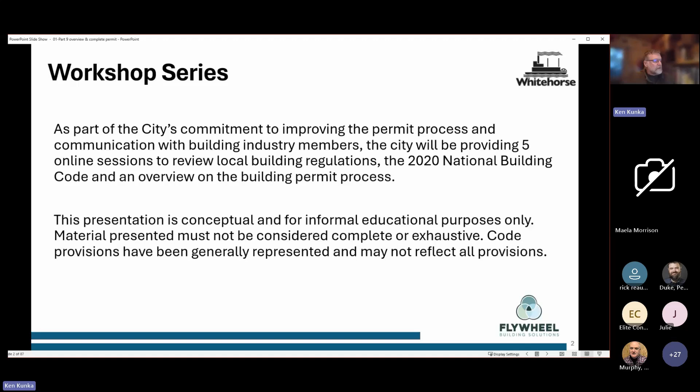This presentation is conceptual and for informal educational purposes only. The presentation is not considered exhaustive. I'm just going to touch on codes and bylaws today, but I really suggest you do a deep dive as we work through the 5 sessions over the next few months. The code provisions generally represented may not reflect all provisions.

As Peter said, we're committed to 5 workshops. I really appreciate the opportunity to sit down with you as a builder group, and the time I had up in Whitehorse was fantastic. I've never been up there, and it was really great to be able to see the town, and really looking forward to making it back in the summer.

So today we're going to look at codes, bylaws, and regulations, an expansion of what we did in the workshop, and then we'll move into the more technical items. Eventually, all these webinar series will roll into an online and hard copy guide for permits for residential permit types, which I hope will help in the permit and inspection process.

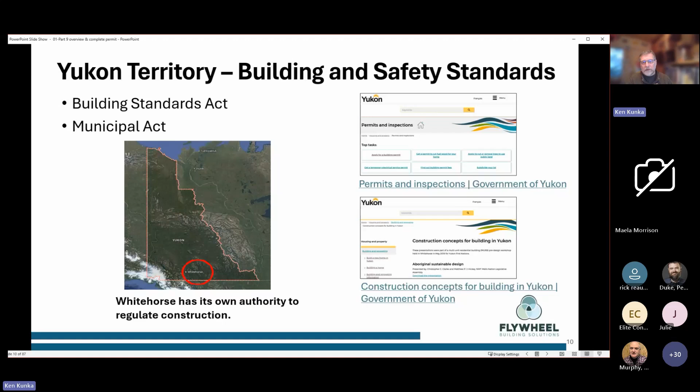So, Yukon Territory, the building safety standards - this is interesting, I had thought that there was a...

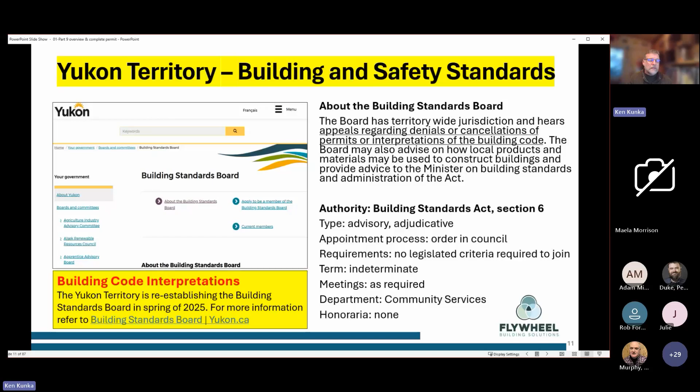Here's appeals regarding denials and cancellations of permits or interpretations of the building code. This is really important because if you get in a bit of a loggerhead with your local government here in Whitehorse, there is an avenue. Unfortunately things kind of slipped off the rails, and I believe the board is reestablishing itself - it's really good, and I believe there's also some interpretations and appeal requests in right now, so keep your eye on that. If you would like to be more involved in construction and regulations, I would recommend that you apply for this, and there's some links towards that. It's a really great group, and again, that unbiased third party between you as the developer or designer on that side of the industry and the building officials in the town of Whitehorse. If there is a little bit of a disagreement, there's an avenue to review.

I'm going to go over some of the regulations on a high level, and these are prescribed to outline what a jurisdiction can and can't do. So there's the Municipal Act, and I've listed a few sections here from the workshop that we did. There's general jurisdiction to pass bylaws, so it's really important to understand that the city doesn't just make things up. There are policies and things change from time to time as projects evolve, but everything's based on establishing rules within a bylaw, and that's where the jurisdiction administers, particularly here, in exercising the bylaw-making power, section 266, without restricting 265, which tells you there's the Building Standards Act and what that plays a part in.

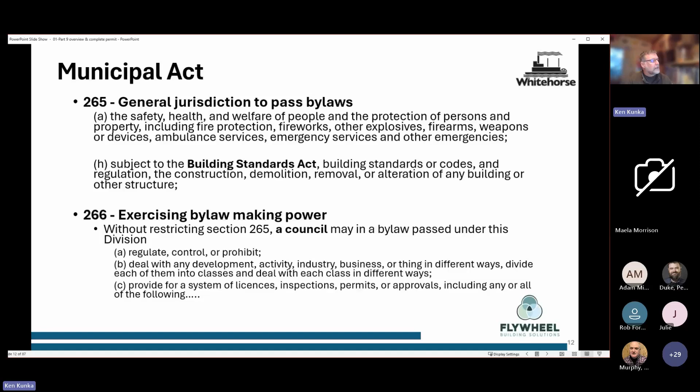Without restricting 265, a council may in bylaw pass under this division, regulate and control and prohibit, deal with any development activity, provide for any system, license, inspections, permits, or approvals. So again, that's where the city gets its authority to act related to construction. The Building Standards Act also ensures that the national code is the building code that will be used.

It's funny, over the years I've had people phone me, especially here in the Okanagan where we have many small towns and Kelowna, the big city, and they ask what code are you using? It's like, we're all using the same code. We're using the BC code here locally, but it's the interpretation that gets a little cloudy.

That's why we're having these sessions, to ensure you understand the premise of where the city is coming from developing bylaws, rules and processes, and where you can provide input and commentary, perhaps making it better, because the city is making a lot of changes as a commitment to improve permit processing.

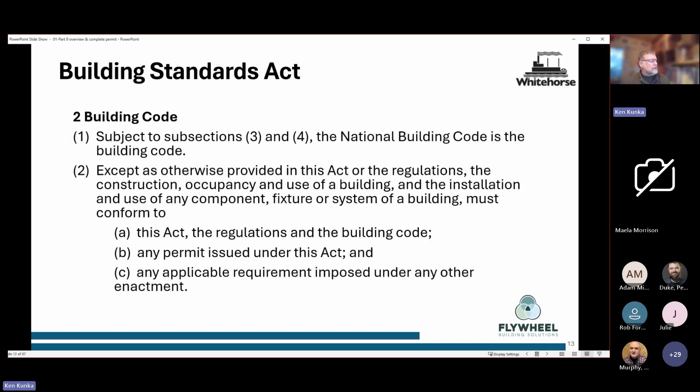The national code is what we're working off, the 2020, except where otherwise provided in the act or regulations, for the construction, occupancy, and use of a building, and installation of component fixtures and systems—your plumbing, heating appliances, those types of things. This act and regulations of the building code apply to any permit issued under this act. Just a bit of background on that.

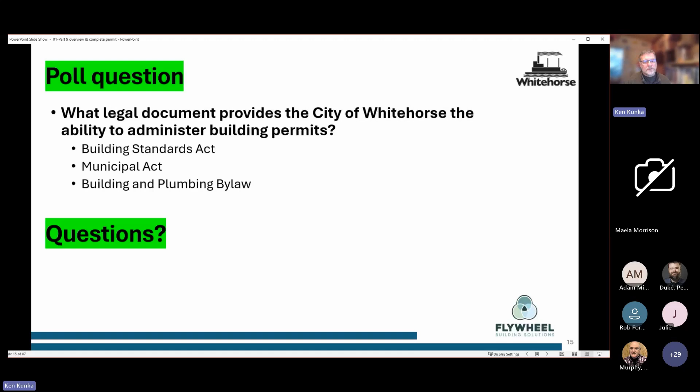Local bylaws—so we've gone from federal jurisdiction, to Yukon, and now into a local area here. It's really the city's building bylaw that administers how construction permits are dealt with. The bylaw applies to the design, construction, and occupancy of new buildings, and the alteration, construction, demolition, removal, location, and occupancy of existing buildings. That also includes the change of use, which we'll touch on a few times this session and the upcoming session, especially near the end.

The building code applies to all the work regulated by bylaw within the city of Whitehorse, as prescribed in the Building Standards Act. And as the Building Standards Act notes, it's the national building code that we're working off.

This is just an example—the bylaw is a little bit older, adopted in 1999. It's had a few amendments, particularly around dealing with step code, or rather performance modeling. That's an avenue, but I just want to show it. It's not a long document, so it's not a fantastic read, but it's good to know this, because just like you buy a tool, saw, or software system you'd use in day-to-day operations, it's good to understand that this is really what we're building off of—the bylaw—and it will likely be updated as processes change. They kind of have to happen hand in hand as we move forward.

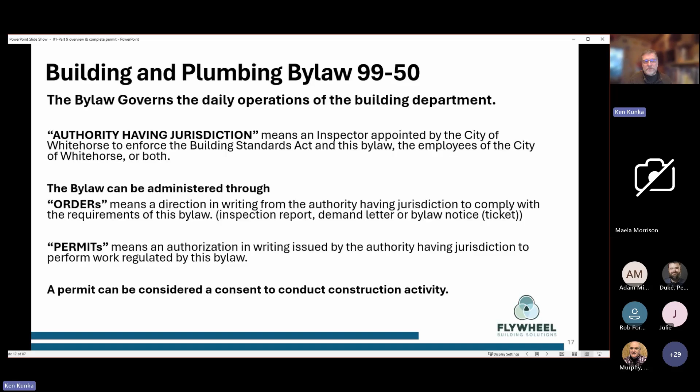I like that connotation of it. So again, the permit equals a consent to build, and the bylaw outlines when you need a permit, when you don't need a permit. But really, a permit ensures general compliance with code and the city regulations, so not just the building bylaw and the building codes.

It also, if you've been through the process through the years, involves other bylaws, which we'll touch on as well. It ensures safety for family, workers, patrons, and emergency responders - so anybody going and using those buildings. It also now involves energy conservation and accessibility for all members of the community.

It ensures long-term sustainability of the community. And what I mean by that is making sure buildings are built well. The bylaw itself doesn't guarantee workmanship, being plumb and square, but ensures it meets minimum standards.

It also ensures that as part of the process, permits are finished out, and buildings are not left incomplete, which will degrade the building over time. It's not finished off properly, and it also doesn't look very nice for the community as a whole to have unfinished buildings and projects, particularly when things are selling and purchasing, and then people find out there are open permits. Not great for the community as a whole.

It protects the future owners of the building, and when I mean that, we usually think about customer service, providing customer service. In our line of work as a building regulator, that's what we're hired to do. We're here to help you through the process as a building industry partner, but as you know, there's many gears and many hoops to go through to get to the end product, and you're our customer.

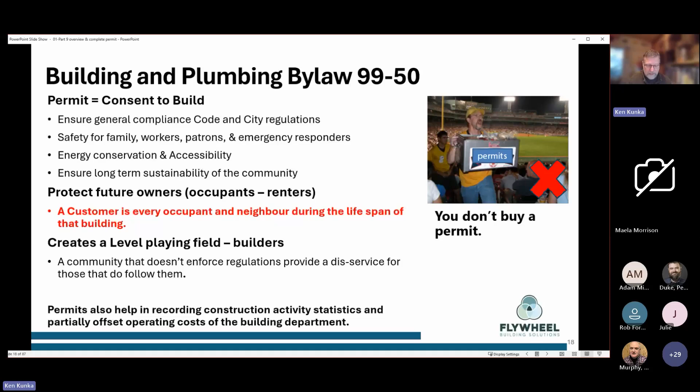Permits also help in recording construction activities, so we know what's going on in the community, relating to our budgets, and it partially offsets the operating costs. It doesn't cover all of it, not nearly. I don't think there's any discussions for fee increases - there always is, as the economy changes and inflation goes up - but at least permits help offset and not feed into taxpayer support for building and plumbing.

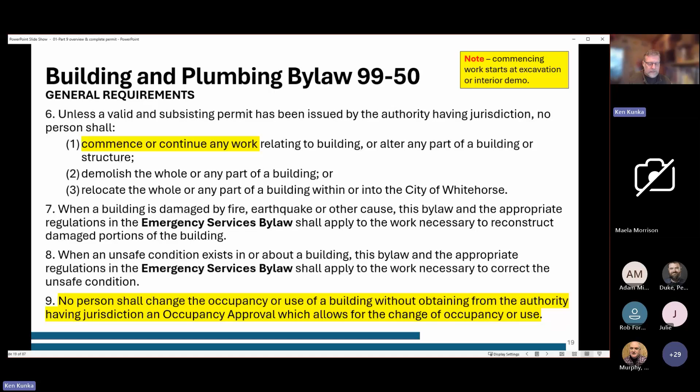It may change from an office space to a retail space, or retail space to a small coffee shop. You're not maybe even doing any structural changes, just painting and adding little bells and whistles to the unit, adding a wall divider. But again, you're changing the use. That may implicate the fire separations required between units in a commercial building, or impact exiting routes or number of exits depending on the use. It's really important when doing commercial alterations, even changing a garage to a finished space - that's also a change of use. You want to get a permit for that too, because there are a lot of safety and health standards to maintain.

Just going to go through a few bylaw sections here - the highlighted exemptions. Anything more infrastructure-related is not regulated by the bylaw, but I wanted to highlight this one because it can be controversial, especially now in this day and age of small office buildings or units being placed on property, short-term rentals, those types of things. Accessory buildings not greater than 10 square meters in building area, provided they are not used for occupancy - meaning not intended to be lived in. They're really a garden shed. The one thing that may be coming up as a change is the 12 square meters.

And I see Peter's also put some notes in here in the chat, so you may want to check on upcoming changes to the bylaws.

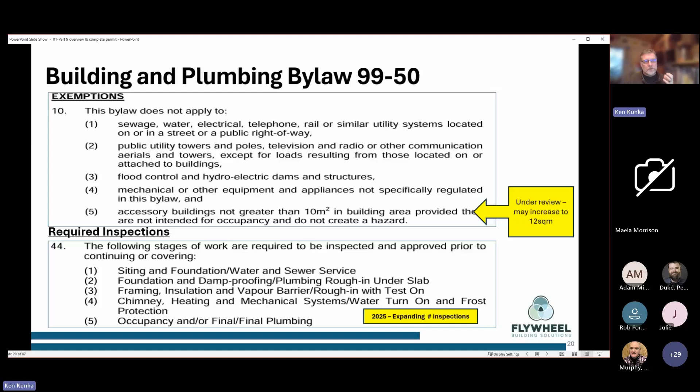The following stages of work in section 44 list the minimum inspections, particularly with residential construction. These have been expanding and will continue to change as the building process becomes more complicated. Richard has explained to me that there have been some issues, so they're segregating some of the inspections a bit more in detail, which may delay things but may also help avoid problems in the process. You have to look at it two ways when thinking about inspections: it ensures minimum standards are met through the phases of the auditing process, but it's also helping you as a builder collect yourself and your trades, making sure through the stages - and there'll probably be a few more stages - we'll go over that more at the end of the presentation.

Obligations of the owner: the owner is ultimately responsible. If you're a contractor or developer acting on behalf of the owner, or you may be a spec builder, you are the owner. So you take a lot of responsibility, both in the national code, meeting those standards and requirements, particularly in the building and plumbing bylaw as well.

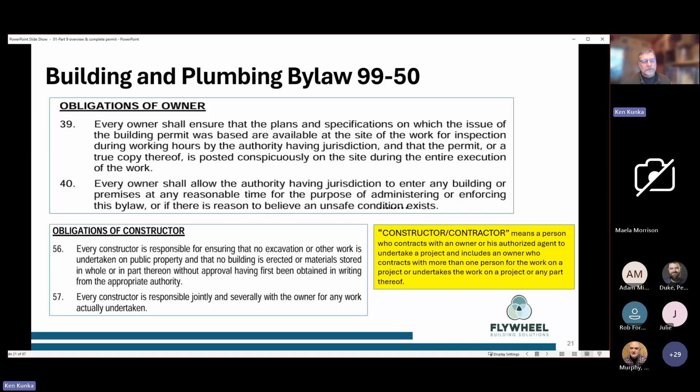There's also a section on obligations of a constructor, and this has been in standards for a very long time, and it's been brought into a lot of new model bylaws just to make sure that the person or persons working on site on behalf of and being hired by the owner or the owner's agent take on a lot of responsibility. If things go wrong, people can't just decide it's not their responsibility to fix these things. Everybody has to play a part in this, and the bylaw outlines that.

So it gives some responsibility on the building official side to keep the process going. In appeals, I had mentioned that if you're having some difficulty with your building official, internally they're always debating and talking about building code items, plumbing code items, and bylaw interpretations.

And there's a lot of vetting internally when you have multiple persons on staff. It's a little different in a small town when you have one building official who becomes the sheriff of the town - you don't want to take their bad side. But here, even in the few days I was here in December, I heard a lot of discussion and changes and ideas about code interpretation.

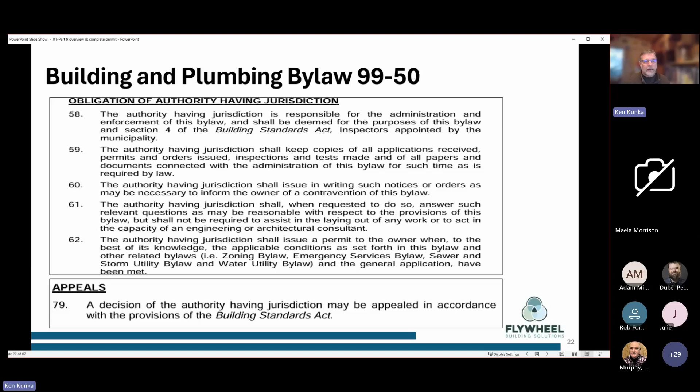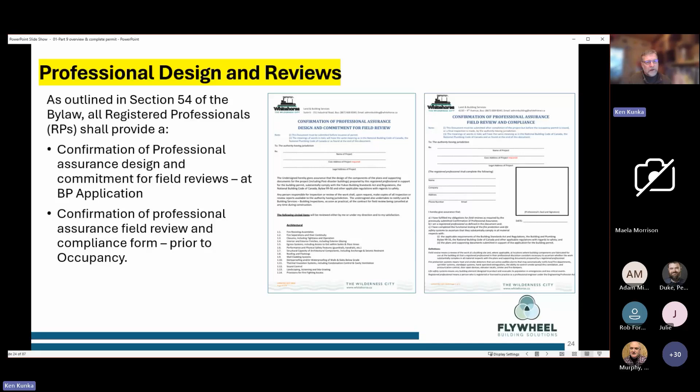And then at the end, when field reviews and construction are done, then you're signing off. So just want to be mindful - this will come into play a lot more for some projects as we move ahead.

There's also the project contact list, and it's really important when you have multiple professionals - you may have a geotech, you may have a structural engineer, you may be working on a larger project. This session and most sessions moving forward will focus on small residential Part 9 projects, but if you're dealing with a larger Part 9 or a Part 3 building, a more complex building, the city will need you to list all the professionals, because I believe what doesn't happen in the Yukon and specifically in Whitehorse is having a coordinating registered professional. If there's somebody on the building side who knows I've missed that, let me know.

You could have multiple engineers and an architect, and the coordinating registered professional makes sure they're all working together. That was brought in, in BC, in the mid-80s, when they were having large projects and the engineers weren't coordinating with each other.

We call it the Save on Foods case, where I think it was the day or the day after this big Burnaby store opened, the car park on the roof actually collapsed into the grocery store. That's because somebody wasn't overseeing what was happening on the engineering design and people weren't talking to each other. Unfortunately, it's happened in other cases.

That's why it's really important to list all the professionals and all the contractors and sub-trades working on the project. It also relates to business licensing, to make sure everybody has a business license.

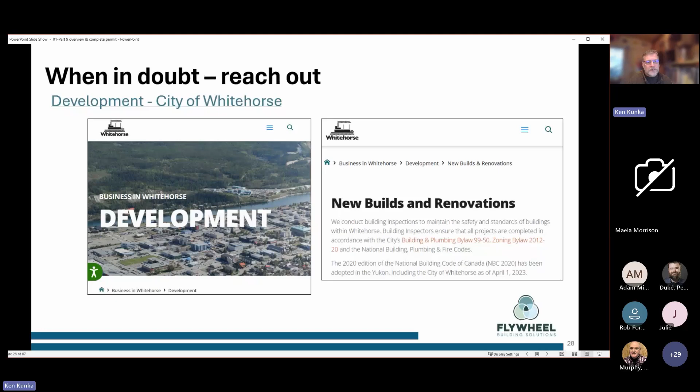If you have a question, or you're thinking of doing a renovation or new construction, or even using a different kind of product or way of building that you've seen somewhere else, it's really important to reach out. It's not a big town, so there's no excuse not to stay in communication.

This is a poll question again — you can think about this or put it in the chat. What legal document must be provided by a registered professional at the time of the building application stage?

I had mentioned there are a few different documents. Basically, it's a confirmation of professional assurance of design and commitment for a field review and compliance. So by the nuancing of the word here, it's the commitment for the field review — the design meets code and the bylaws, and then there's the commitment for field review. That's the form you want to bring in.

I have about ten slides here, and after that I think we'll take a break. But if you have any questions about what I spoke about regarding the regulations, let me know.

So now we've gone through the multi-level layers of federal, provincial or territorial, and local bylaw jurisdiction and building regulations. Now we're just going to go through a quick, and in some aspects deep, review of the national code and how it was developed.

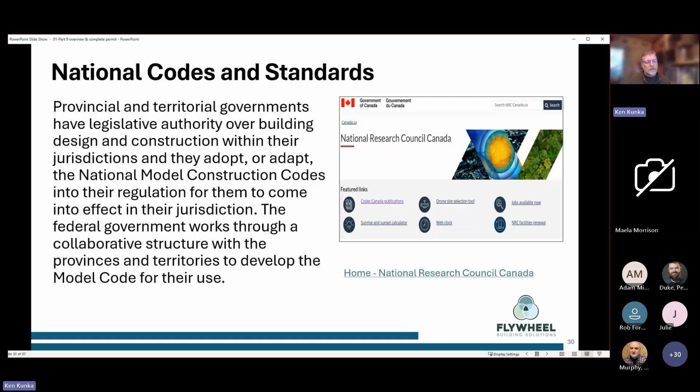Regarding higher density, the codes are continually evolving. The national code was set up through the National Research Council for all provinces, territories, and local jurisdictions to use and model after. Codes are the minimum standards. They're created for the worst case scenario, which in our industry as a building official means people die, people get sick, and then there's the financial implications.

If you're aware of what was happening in BC and other jurisdictions in the 90s, it was the leaky condo crisis, where billions of dollars were spent fixing buildings that should never have had to be fixed. That was a compounding of different issues where the codes had changed, the trades, and even the building officials weren't totally up to speed on building science.

Poor detailing previously was actually enhanced by sealing up the building. Sealing up buildings is great because it becomes more energy efficient, but if you're still using the same old ways of detailing the building envelope, you're not allowing those walls to dry out. So there's a compounding factor of things that led to many changes, particularly here in BC, but also nationally. We've had whole subdivisions in Alberta burn down because they built them too close together.

Unfortunately, through history, this has happened too many times, and we forget the past. But really, we have to think about worst case scenarios. Sometimes when your building official and yourself on site are debating, or a designer is debating something, it's like, what is really the big deal? Well, the big deal is something bad can happen, and we're trying to avoid that as best we can.

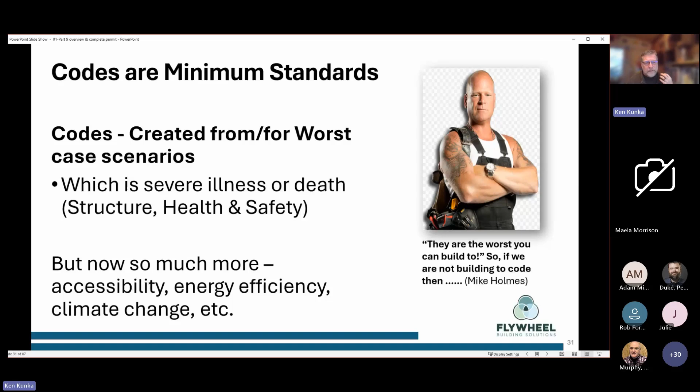You're seeing climate change. When I was there, it was minus 15 one day, and then it was plus 5 three days later. There's some really strange things happening now in the climate, and I also believe there's some things happening that we really need to take and address in future codes.

The national standards include 4 basic codes nationally: the building, the plumbing, fire, and energy codes. For our future reference moving forward, I'll be mostly concentrating on the building code and in part 9 of the building code. The NBC is made up of 2 volumes.

There's volume 1, and then there's volume 2. Volume 2 is really dedicated to part 9 sections. It's really based on an objective-based code format, relying more on objective and functional statements. There's a rhyme and reason to why these items are in the code, and actually the code explains it when you're trying to achieve it.

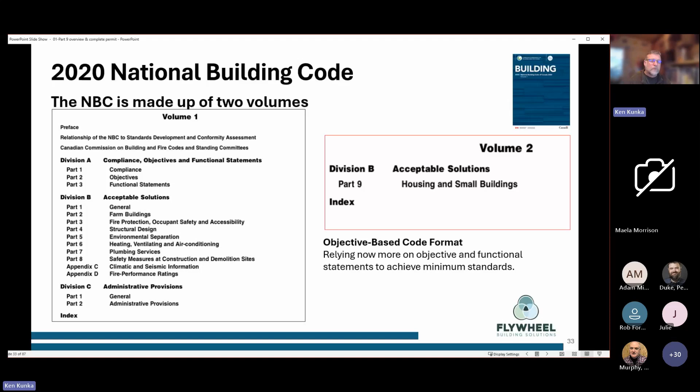In volume 1, it's broken down into 3 main divisions. There's Division A, compliance objectives and functional statements. Division B, acceptable solutions, which I've highlighted, and I will go over that in a few slides from now.

And Division C is administrative. A lot of people just think about what the code is, whether it's building or plumbing. They only look at one part of the code, if they do happen to look at code or the bylaws. But there are two other parts that are really important to understand, because they all fit into each other.

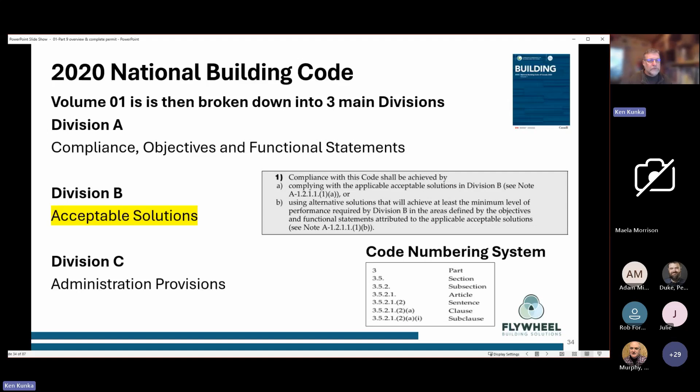Division A defines the scope of the NBC and presents the objectives of the code, and addresses the functions that the building must perform to help satisfy those objectives. Division A cannot be used alone. It's supplemental to the rest of the code. It includes standards and references.

So when we talk about permanent wood foundations, we're looking at S406-16. You have to be very aware of the standard and the date reference of those standards. It outlines defined terms, objectives, and functional statements. And we talk about functional objective statements.

And then you can find within the code, and again, the only problem with the digital code is it's not very functional. I know they're working on that to make it a little easier to move with hyperlinks, but for time you can work yourself through it.

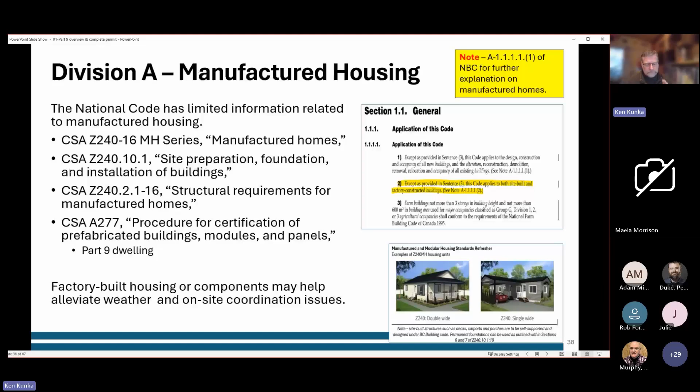I believe the other items outside the building, I'm just going to go back to that because it's a really important note.

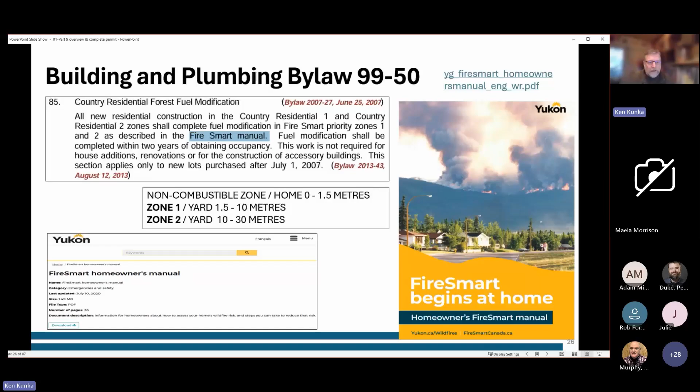But I think it will, and even codes will start demanding this when you're in wildfire interfaces, and this will be driven by insurance companies no longer insuring homes or buildings if you don't meet certain requirements. That's what happened in Lytton. And there are actually some fire resistant rated walls now developed by RDH, a building science firm. It adds cost, but what is the cost of losing your home when you don't have to, from fires spreading between each other?

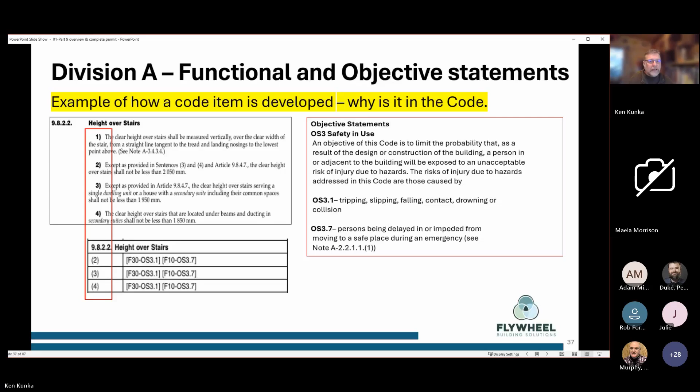Thanks, and I'll look at that, looking at the chat again. We're going to talk more about that as we move forward.

Volumetric modular projects, so again, not just small single wide, double wide, A277, which could be a house built on a foundation, but we're also looking at volumetric. You could have a very large building shipped into town in components and set up.

So you can imagine once you get the foundation and servicing in, it'd be quite quick. This standard, if you're interested in looking at something like that, it's not in the code, it's not a standard requirement. It's more of a guide, developed with all industry partners, talking about how building officials get involved, how the local community jurisdiction works through the process with the building industry partners to make sure it's a smooth process.

Because the biggest issue with any type of manufactured home, especially volumetric, is that all the permits have to be in place and fully understood before they actually begin production. So the sooner approvals or pre-approvals can be developed with no changes required, the building process can start right away.

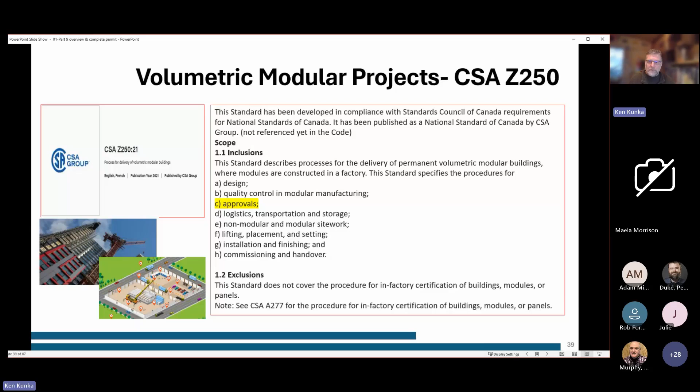Division B, and I mentioned acceptable solutions. The term acceptable solution refers to the technical requirements contained within the code. It reflects the principle that the building code establishes an acceptable level of risk or performance, and underlines the fact that the code cannot describe all possible valid design and construction options. Acceptable solutions represent the minimum level of performance that will satisfy the national code objectives.

The authority here locally in Whitehorse, the building official, adopts the NBC into the law and regulations. It's an acceptable solution to meeting a requirement within the code, to build to a minimum code requirement. The acceptable solutions are linked to at least one objective and functional statement, which we went over previously.

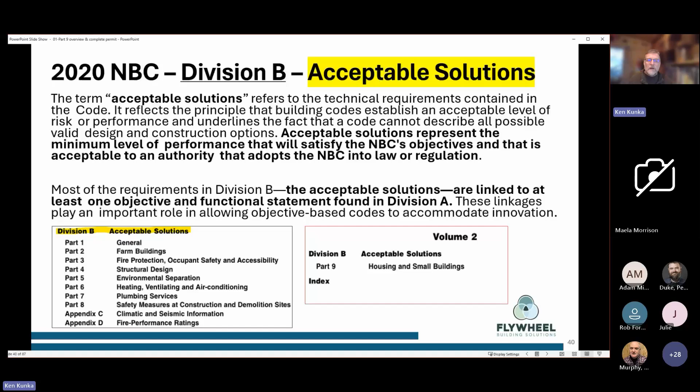Why is it in the code? Well, it outlines the functional objective statements in it. Climatic data, let me just go back, sorry. Yeah, Division B, climatic data is found in Appendix C.

Whitehorse is in climatic zone 7B, as I'm sure you're well aware. We had been talking about some frost protection depths, and it's quite drastic in Whitehorse compared to Vancouver, where I used to work, where it's 18 inches. So you guys got a lot of work, and I understand some of the complications and soil conditions in new subdivisions are really creating some grief.

Just a note below that highlighted yellow box on the top right: in the code, when you're dealing with Z240, those manufactured home units, there are some relaxations to frost protection in there. So again, maybe keep that in mind. I think that's something to review with your building authorities to make sure that's still a good idea.

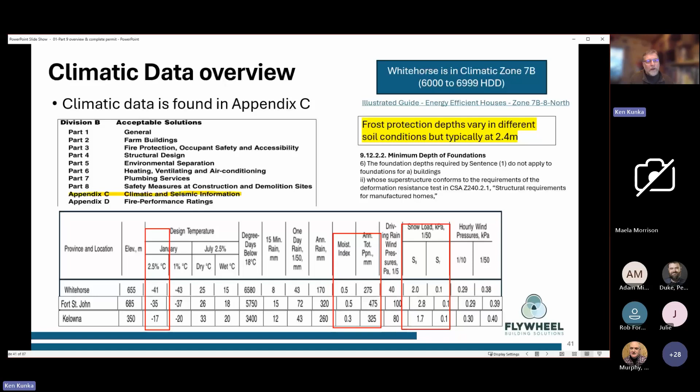When we look at climatic data, I wanted to reference - you'll see on the bottom screen there's Whitehorse, Fort St. John, and Kelowna. Obviously your design temperatures are quite drastic compared to say where I am in Kelowna. But I was really surprised that the annual precipitation, snow and rain, is actually lower in your area. So I always thought Whitehorse was a high snow load area, but my understanding is that through code cycles that is changing. You are experiencing a little bit warmer temperatures, getting a little bit more snow, and probably getting a little more wet snow, which is actually increasing some of your load calculations.

Your seismic data review - I wanted to bring this up because this is going to be a significant change coming up for us here in BC starting this March. All homes, Part 9 and Part 3, are going to fall under new stringent lateral load and seismic design requirements, and I believe that's also going to be happening in the national codes as they roll out too. So it's very mindful, and I'd like to touch on this in session 3 regarding framing. We're talking about design of wall panels to resist lateral load - I have another slide on this - but we're not talking about shear walls or anything like that. You do have to put this into your memory bank of these things happening and changing.

Division B, Part 9. I'm not sure why I had the climatic data in there, but I'll change that for future presentations. I just want to touch on these items today, and then we'll jump into some very specific permit requirements - applications and definitions, materials, and structural requirements.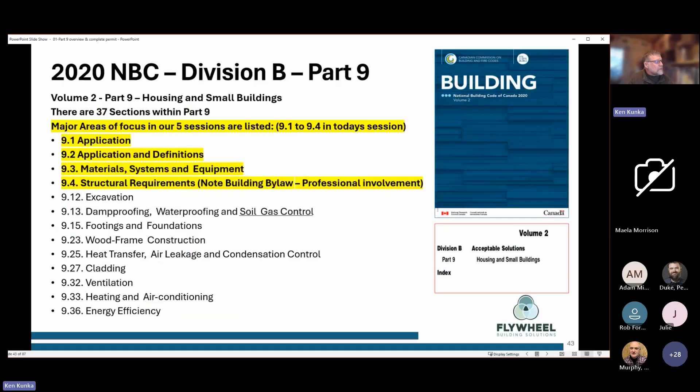9.1 to 9.3 of the NBC covers floor area limits and secondary suites, which is different than the BC building code. There are outlines for concrete, and just be aware that when you see designs, unless they're through a professional engineer, there's no requirement for rebar in concrete, other than when dealing with insulated concrete formwork, ICF, which is prescriptive in the code. So there's a bit of a misunderstanding out there - even designers don't really have to put rebar in designs. Technically they shouldn't, because they're not a professional engineer. So it's really up to the standards of the builder who wants to put that rebar in, because it can probably prevent some issues happening later on. But unless it's a registered professional, nobody should be designing that other than the prescriptive measures for ICF.

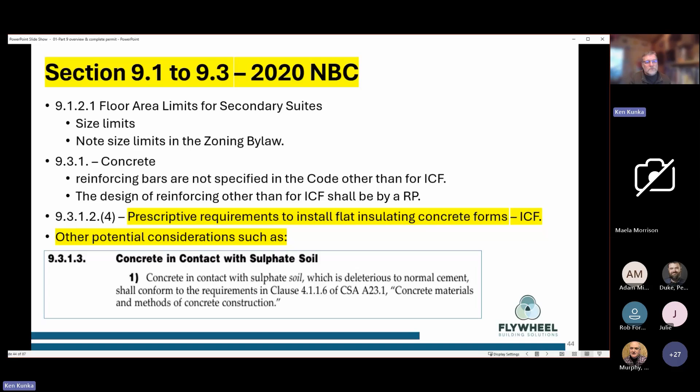There's also other items when you're dealing with subdivisions. You want to understand the soil and soil materials, not only for what we deem as ice lensing - soils adverse to freezing - but there are also certain soils in the community that are adverse to even concrete. I know here in the Okanagan there are some major issues with soil conditions actually eating into concrete unless the right admixtures are in there.

There's cold weather requirements, which is kind of a funny thing, because for many months of the year you're in definite cold weather conditions. But I think we have to understand as an industry that you're not going to heat and hoard your whole development site during the winter. Are there other precautions that can be taken at different stages of construction? When I was there, I was really surprised to see how many heating units are going into buildings, and seeing the amount of frost leaking out of the buildings, developing on the building envelope on the outside and the interiors. So you have to be really mindful of the amount of water that you're putting into the building, and I'll touch on that in a slide coming up.

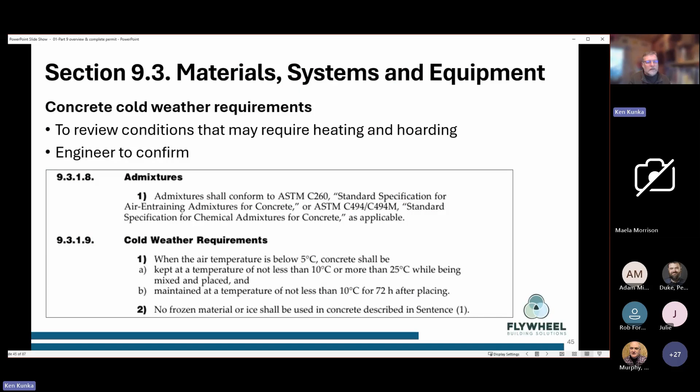So here's structural requirements 9.4. This outlines when you're doing a Part 9 home, a house, a simple building, an accessory building, how you can work in Part 9 and not need an engineer. Or maybe you need an engineer for your foundations because of the soil conditions or how the foundations are being constructed, but the other parts reflect back to Part 9.

When you look at the left side at 9.4.2, specified loads, A, B and C: the roof and wall planes to be clad, sheathed, or braced at least one side - usually your OSB. Small repetitive structural members spaced not more than 24 inches on center, 600 millimeters on center. The clear span of any structural member does not exceed 12.2 meters, which I believe is 40 feet. So if you have a truss greater than 40 feet, that's designed to Part 4 now, not Part 9.

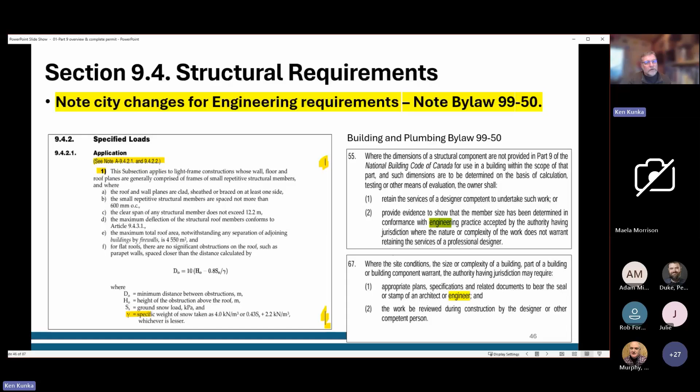Even with engineered design, there's been some debate, and I'll touch on that in a slide coming up, that an engineered truss is an engineered product and should have an engineer designing and sealing it. I know there's some discussion there. Going back into the bylaw, these engineered components, as an engineered product as a whole, if not meeting Part 9 prescriptive requirements outlined in 9.4.2, you're looking at bringing in an engineer.

Specific snow designs - being mindful that as climate change happens, whether you agree or disagree how it's happening, something weird's going on. You're really seeing dry summers and now wetter, warmer winters, which really impacts your snow loading. Just a calculation of how you're looking at this, and being mindful of where you're using balconies as part of a roof structure - there are some prescriptive measures there.

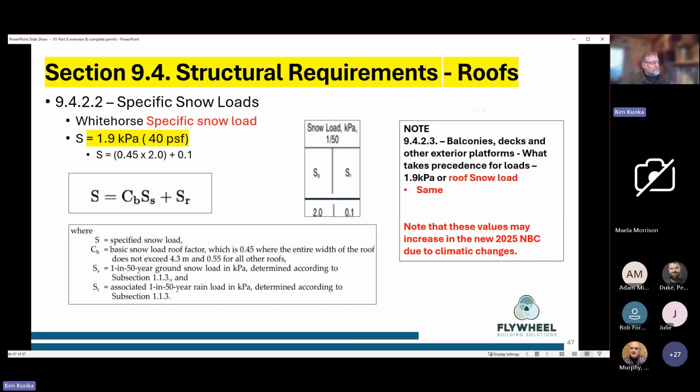If you weren't aware, adding solar panels - I saw a lot of solar panels, which I think is a fantastic idea, since for the majority of the year you're getting a lot of sunshine. But the national code, and now the BC code, have adopted a similar format that those need to be evaluated by an engineer. So when the truss is being reviewed, if you're putting a solar panel system in, those have to be designed for it.

You also have to be aware that if you're not putting in solar panels but instead a metal roof with snow dams or snow locks in place holding snow, you're changing the dynamics of how that snow sits on the building and collects drifting snow. We have to take those precautions into account - we have to be mindful.

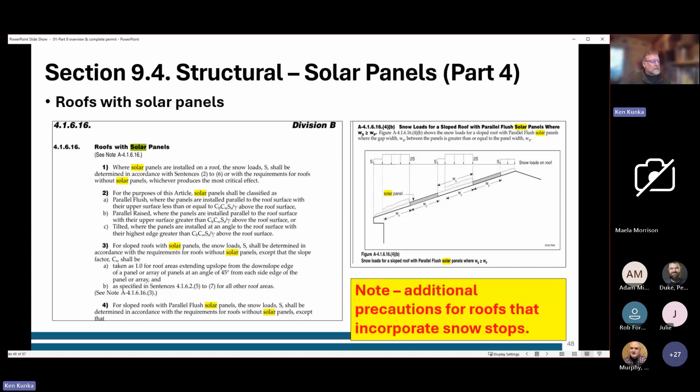When we look at soil bearing footing design, you're looking at 9.4.4, the foundation conditions, and we're going to do another deeper explanation in session 2 on this. I just wanted to show you what's going on here, and we'll go through some of the subdivisions and soil reports, and outline what we're typically dealing with.

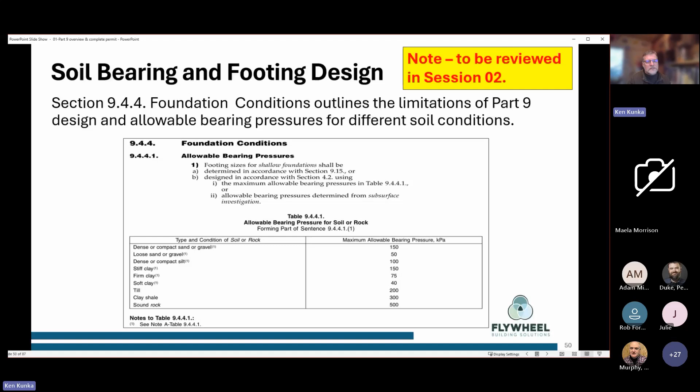When you're dealing with your older subdivisions - Copper Ridge, or I can't remember the specific name - those have a lot of free-draining soils, so you probably didn't see a lot of problems. Now you're seeing soil condition issues: bearing complications, unevenness, soil conditions freezing, moving and heaving. We have to really take this into mind, and that's why the city is becoming a little more aggressive in looking at engineering.

When you go into Division C, you're looking at administrative items. I showed this because Richard and I have talked about it quite a bit - you do have your building bylaw, and that's really what you need to stand on as a local government in the way you move forward administering permits and code. But here, it's really old.

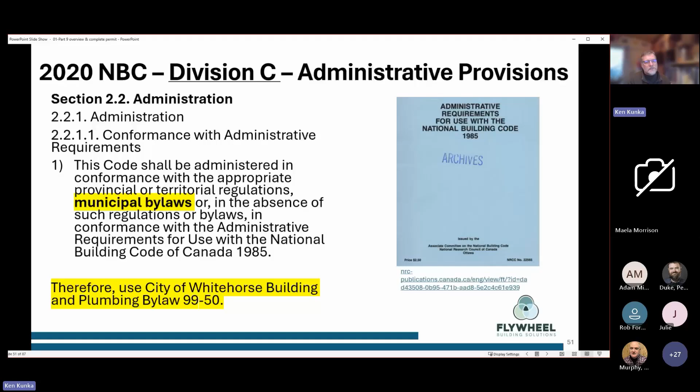It's a 1985 document, and it basically outlines the exact same things: how and when you need a permit, how you issue a permit. So I wanted to outline again, reinforcing within the code itself why permits are important and regulated.

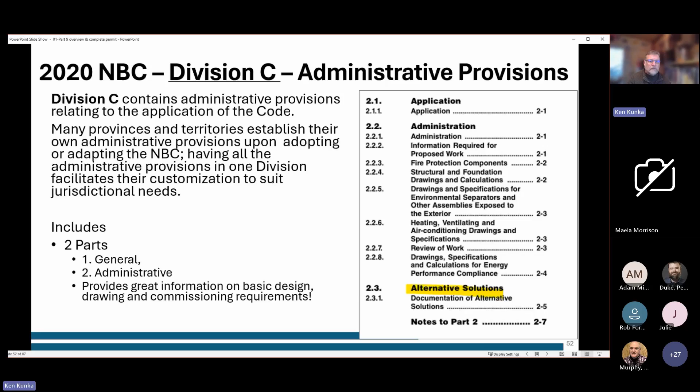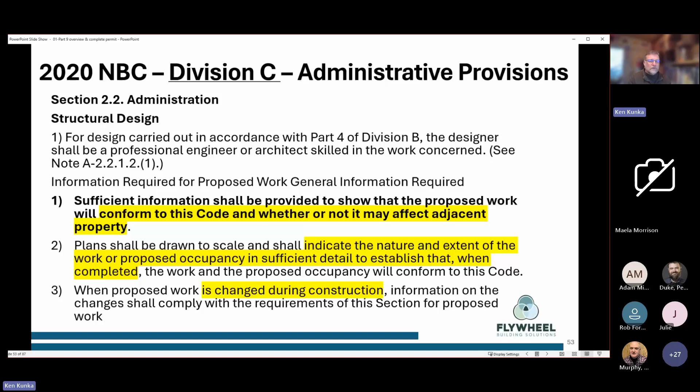Division C really outlines some basic parameters of how you design structurally. For design carried out in accordance with Part 4, it wants that design professional to be very detailed and specific, but also aware of what's happening on adjacent buildings. So when you're looking at an excavation, an infill excavation, or a situation where you could impact another property, you have to look at those aspects as well.

Division C also has alternative solutions. We mentioned earlier that alternative solutions could be used to meet the requirements of acceptable solutions. Division B, every page says acceptable solution, whether it's a Part 3 building or a Part 9 building. And if you can't meet that acceptable solution, that line item in the code, for one particular reason, you could propose an alternative solution, as long as the alternative solution makes sense.

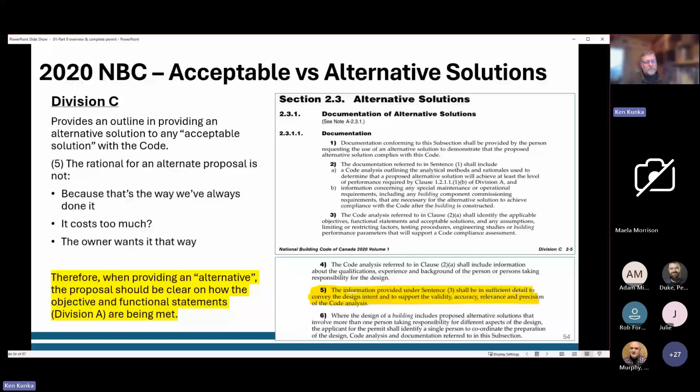You want to say: this is the code requirement, this is why it's a problem, why you can't meet it, and this is what we'd like to do, but this is how we're going to achieve the intent or the objective and function statements. Not that the owner doesn't like it, or that it costs too much — those aren't good excuses. They're a valid concern, but not part of the acceptable and alternative solution process.

When you're developing a design and something goes wrong or you need to change it, you have the objective and function statements, but you can also reference this older document. There's an intent statement that gives a deeper dive into why it's in the code and why it's important. But be mindful, this is a very old document, from 2015, and it hasn't been updated. I hope when the 2025 code comes in we can actually see intent statements linked to the objective and functional statements.

So just a question: where are acceptable solutions found in the NBC? As just noted, they're in Division B. So acceptable solutions, and then you can move into Division C and look at alternative solutions.

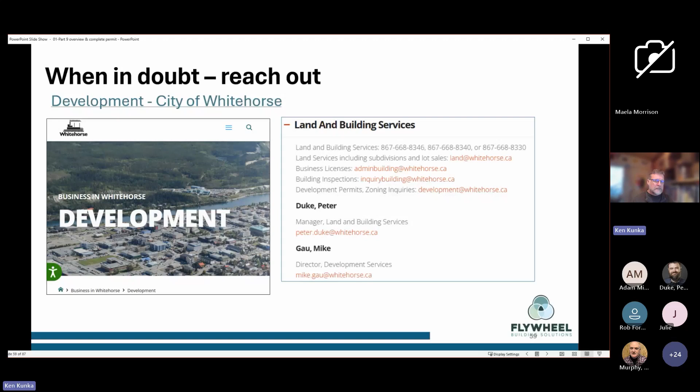So the DP process has a number of forms to be filled in. One main point is crucial: ensure all the information provided at the time of development permit application is complete. Your building permit and development permit kind of go in at the same time, so make sure whatever form you're looking at, you understand and read it carefully, because with new residential construction there are certain extra forms to fill in. Make sure you have your project information, detailed site plan, lot grading plan, fees, and declaration all together and ready to go. What happens most of the time with applications, and why permit processing takes longer, is piecemealing information, missing information, or incorrect information—then revisions are required, which really slows the process down on both sides of the review.

Form 3B looks more at your zoning requirements, and it's really important to make sure all that information is filled out so it can be audited by the development officer. And if you have a living or garden suite, there's also a form that goes along with that.

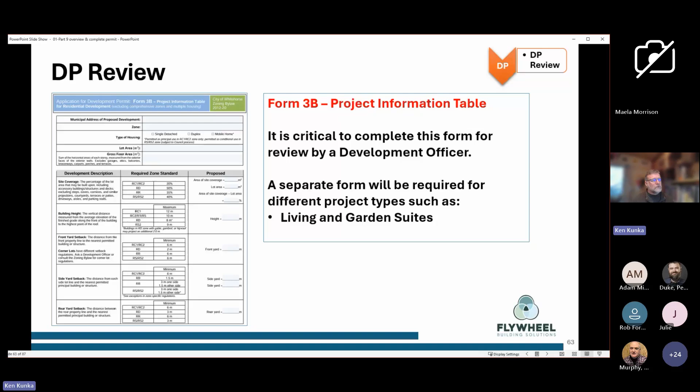This is a really great document—the City of Whitehorse Development Guidelines for Lot Grading, produced a few years ago. I'm assuming it'll be modified and updated as we go through this year and into next. I want to make sure you're aware of it as a developer, builder, designer, or even a tradesperson. As a tradesperson you're a huge important piece of this, and the more you can learn about the process as a whole—or as a builder, get your trades involved in understanding it—the more you have a fully integrated, involved team at the design stage and through the build-out stage. It's really important, and this is one document that's really well done.

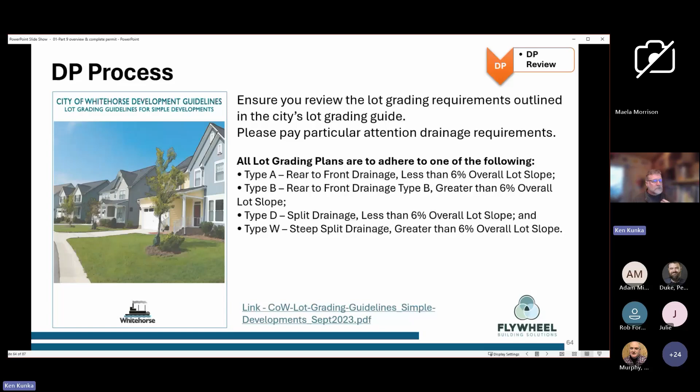It outlines lot grading plans. Quite the situation can go sideways pretty quick in Whitehorse because there's really nowhere for water to go unless you're moving it away from the building. So they have slope designations in here, and again, I have a link to this guide.

I just wanted to highlight the roof drainage requirements, something Richard and the team continue to remind me about—so, where's this going? Where's your drain tile? We don't do drain tile because it doesn't go anywhere; it goes through the sump system. Again, what do you do with your roof drainage? It has to go down—where does it go, into the ground, into a pipe? It doesn't, actually—that was a learning moment for me. Where does it go? There are some very detailed outlines here in the guide showing that it goes to swales.

You're controlling it away from the building, moving to the back or to the front, and then in some cases moving to the front onto the city side of things where the water's being dealt with. So those are your roof drainage and then your swale system.

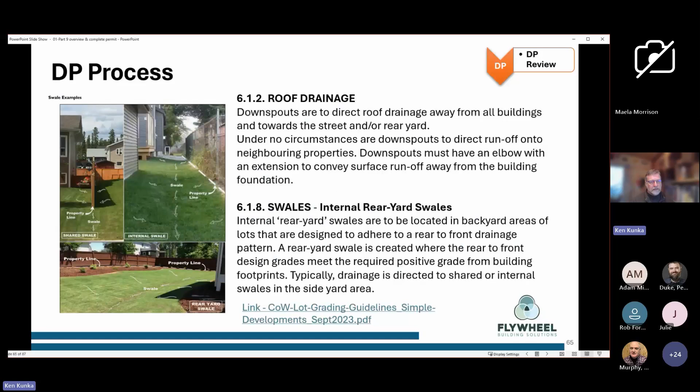Being very mindful to understand this guide, I think it will help you a lot. And then your lot grading plan - there's a number of examples in the guide. You want to ensure all the information is listed there to show a pretty picture. So at minimum, try to get all that done.

Note that infill lots require additional information. I would tend to always think, talking with my plan reviewers as a manager or designing a building, an infill building is thinking 5 feet beyond the property lines. Because when you excavate, what's going to happen? If you're not really in tune to that - and we're going to go over that in session 2 quite a bit - and really to work safe as well as not being a bad neighbor for your neighboring properties, that's what happens when you excavate at the property lines.

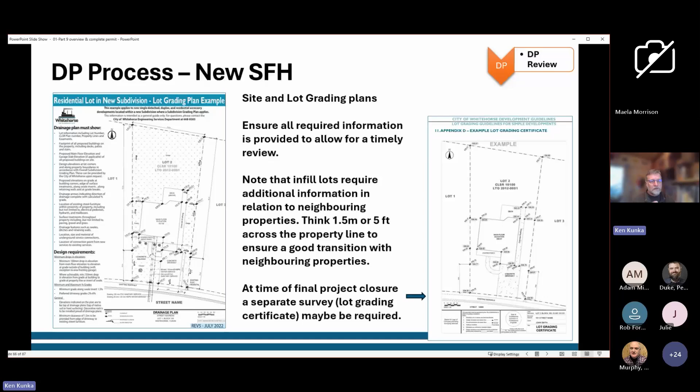You're probably going to see erosion, and that erosion is going to lead into what's happening next door. What happens if you have an established house next door that has landscaping? You want to make sure you're tying into those, there's a good transition with those neighboring properties. Sometimes at the end of a project, in order to get final sign off, you may have to provide a separate survey, a lot grading certificate to make sure you're within the issued permit drawings. Again, you're relating to the properties next door to you.

The DP and BP process - again, looking up to 3 residential units. I just put this together and modified it slightly from a slide or 2 ago. You have a DP and a BP parallel review process, which is great, I think it's great. It could speed up the process, but it also comes with some potential issues. And that's when revisions are made on one side of the review, your BP or DP, versus the other.

So you could have changes that are required, you could have revisions that maybe something has been changed by the owner or the developer. You continually have to talk to each other to make sure that the designer, the builder, everybody knows what's going on, and drawings are being updated and reviewed properly.

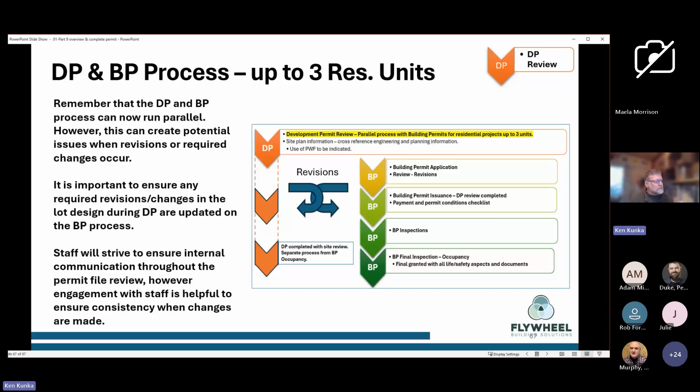But the flip side is the building department's really going to try hard to communicate internally when things are happening, because really what used to happen is you had a finalized DP and all those DP documents slid into the BP process, and then you went along. Well, now you can imagine things start changing on the fly at the review stage, and if they're not being communicated out, then you're going to have some real big problems. The permit could get issued and not everybody's fully aware of a change, and it becomes problematic on the process. So just be mindful of that as we go through these changes in the process.

We typically wouldn't see that unless it's a very large project. By the time you have your permit drawings in place and your DP, you're probably already in a process to start building. So, but they do allow for that. In all cases, you do want to get all the information on these forms.

In 2025, you may have already seen it at the tail end of 2024 - the building department's going to take a lot harder line on incomplete applications because, as I mentioned, those are the ones that really eat into the time of staff. If they're not complete and they have to pick up the phone or send in emails like, oh, you're missing this, can you clarify this, they're wasting time for everybody who's prepared and put in a proper application form. So they're slowing the whole process down. That kind of tough love aspect, I think, is going to happen.

Again, the city is really raising the bar for themselves and improving process and guides and forms. They're asking your community members, your industry members to do the same, and that starts with the application. Make sure the DP and the BP, especially the site grading and infrastructure information, is all there, is servicing information. And when you're having garden suites and infill living suites, that is indicated on the application form as well.

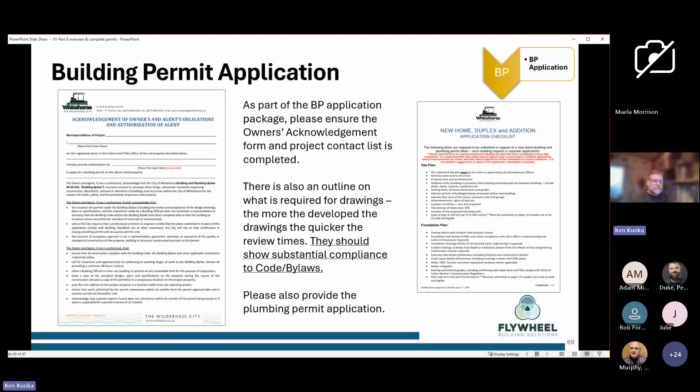It's like an ice jam. You throw all this ice into the river and it gets jammed up. Well, it's not going to move very quickly, right? So if you've got a project right now that can be cleaned up and brought in for permit weeks ahead of time, do that now to allow the team to review it, especially as there's been changes going on. You may not realize there's a change, and then it's like, oh, I need to provide a revision, I need to outline this a bit more. So apply early.

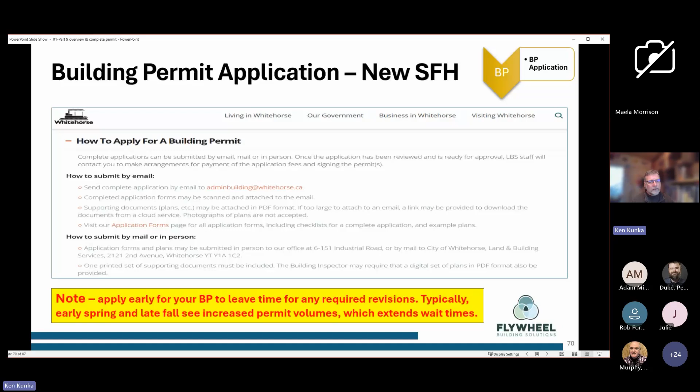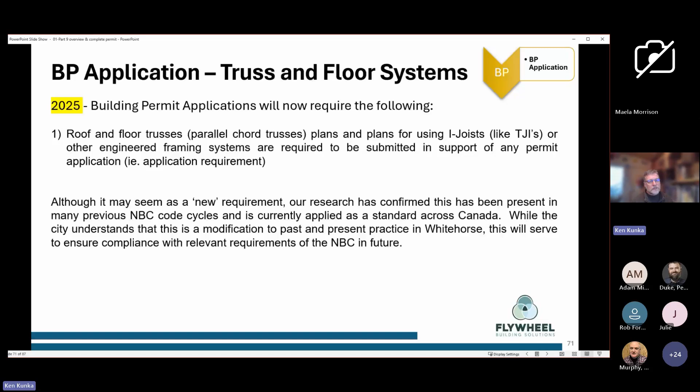Just some information regarding trusses and floor plans. There's been some changes, though this one isn't really a big one. You do need your layout information for your floor systems and truss systems so the building officials can review those, especially for point loads. Application for professional involvement is outlined in the building bylaw and in 9.4 of the code.

There will be more single family home projects involving engineering, so communicate with your building department and building officials about the process and some of the factors why. New home designs are narrower, you're building on lots that aren't really square anymore. You're building in very tight lots with higher density developments, so the homes are longer and narrower, and they have more open floor plans.

Think of a bookshelf and you start moving it back and forth, side to side - that's a lot of lateral load. That's the idea to keep in your head with lateral load and seismic design. There are larger point loads going on as well, and you're looking at increased engineering components, different types of products being used, proprietary products that aren't really outlined in the code. And we're having more serious issues with soil conditions. So again, more engineering on all of those, and we'll go over those in more depth through sessions 2 and 3.

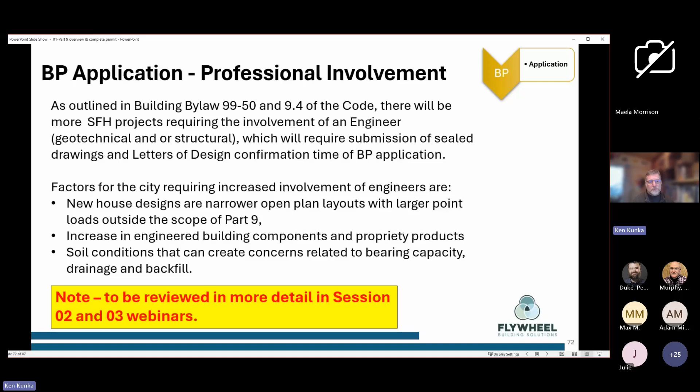Excuse me, just taking a drink.

It's really important to understand the permit, to review it with your team to make sure there's no misunderstandings. If you have a question, reach out to the building official that issued it, or set up a meeting or construction site consultation as soon as possible to make sure there's no problems.

At all times keep the permit package on site, because the building official needs it. There'll be some time in the future where it may be all digital, but what is your team as a builder referring off of as a document? If your tradespersons, framing crew, or foundation crew come on, what are they looking at? If they're not looking at the permit issued drawings, it could lead to a lot of mistakes and misunderstandings, on top of the structural issues you need to take care of.

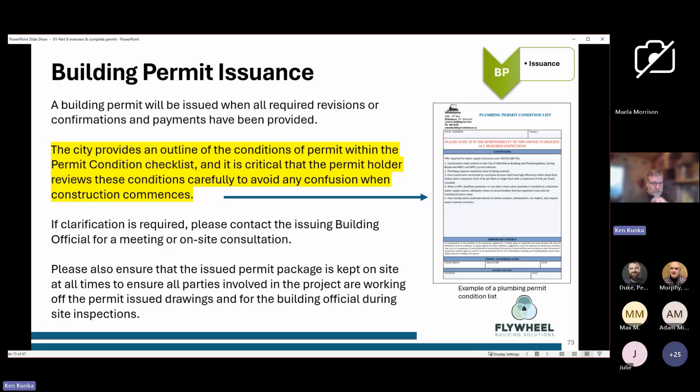The inspections themselves, this is a list, and there's been one change in the process: framing has been split out. I'll go over these pretty quick because I'm running out of time. There are some standard inspections that will be listed on your permit condition list, and there will probably be some more modifications as we go along.

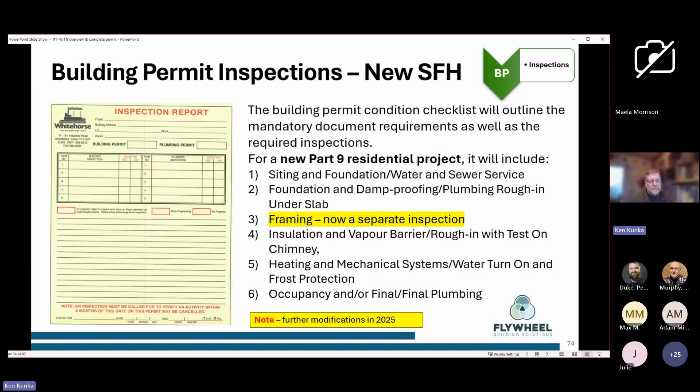This is your inspection report, and eventually they'll probably move into a digital format as well. All your inspections will probably be dealt with on phone or by email.

Siting and foundation, this is the most critical inspection I believe, because it allows for you, your building official, and your team on the building side of things to really understand what you need to do and how you're going to move forward. If there's already some changes being made when you start digging the hole, it's like, well, okay, some modifications are happening here. But at minimum, most inspections—and I'm going to list a few—this will be part of the guide.

I may not be able to go into this in detail, but on these slide decks that'll be sent to you, and the presentation recorded, this will all be built into the guide that's going to be outlined and brought out in March. You want to have good communication and understanding at the start of the project with you, your team, and your building official.

You want to make sure your permit placards, your issued permit package, is on site. There should be no issues related to site safety, infill development issues, and you're working within the limits if you're in a protected area, creek or slope setbacks, and those types of things. This is really important.

There'll be a number of documents required, and as this continues, the building official is going to start looking at your approved drawings, your structural drawings that may be associated with that. They're not there to say yes or no to your structural design, because that's not their job. But if they find mud-filled forms, and the engineer was out the day before something happened, that's something they're going to need to address as a potential issue.

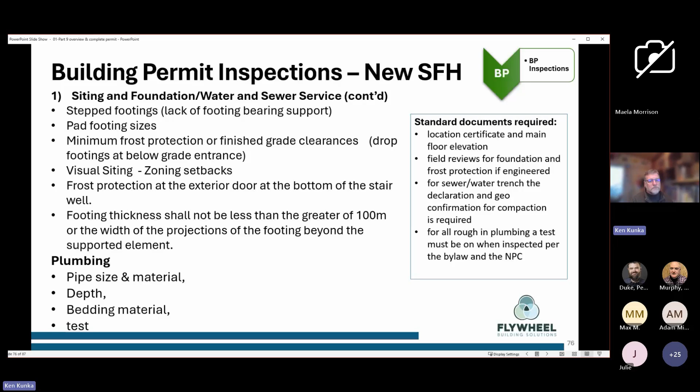Your second step would be foundation, damp proofing, and plumbing. There'll be some basic items. If you have some minor deficiencies from the previous inspection, those should be dealt with—you don't want to keep carrying those through.

The main thing I wanted to get out on this one is there's going to be some standard things that the building official is going to look at, but it's really important that if there are issues, before you backfill, you need to have those dealt with. You don't want to continue on with any loose ends.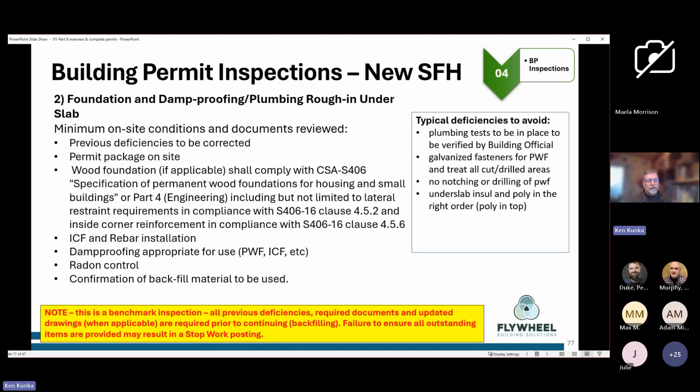This is a benchmark inspection, where before this gets all signed off and approved for filling in, once you get your floor framing system in, you can start moving ahead. The building inspector may stop work on a project if there are a lot of deficiencies outlined here—we can't carry these through as a benchmark inspection.

Framing, again—I mentioned this item has been split apart—so the building official will take a detailed review. They'll be relying on a professional engineer if there's a structural engineer involved.

There's certain things that the structural engineer is going to look at, but there's a lot of things that the building official still needs to look at. So you still need to call for this inspection, even though you have a structural engineer involved.

A lot of things to deal with here are backing framing, fire blocking, your stairs, headroom clearances. You may also be looking at window sizes, which could relate to spatial requirements, like how many windows are allowed near side property lines and interior side yard lot development. If those have changed, it may impact you if you're using energy performance modeling instead of just basic prescriptive R-values. Moving or changing windows could mess up your energy performance modeling.

So again, all these peripheral things - if you do have a structural engineer, you still need this inspection, as it's a key component.

I had mentioned some of my concerns driving around town in December about the amount of heating and water being introduced into these buildings. Be mindful that the code has set limits of 19%, and once that framing is done and you start insulating, it can become pretty problematic moving forward. I lived through that during the leaky condo crisis. You don't have the same super wet conditions all year that you do here in BC and the coast, but you could still start running into big issues there.

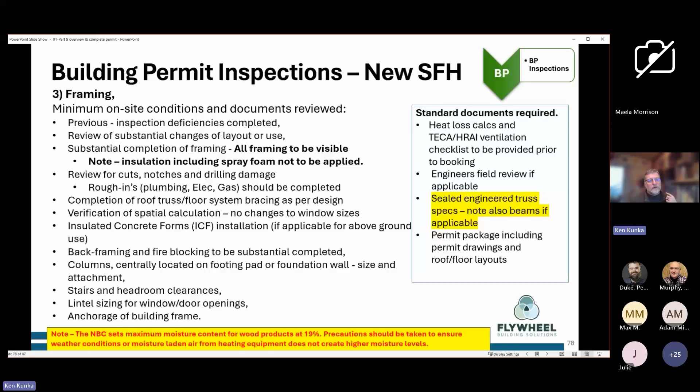The other thing is the bracing of your trusses to make sure that's done. If there's any damage to, say, a TJI joist from plumbing, that's one of the first things I usually look at - you want to make sure those are dealt with as well. Go around the site, check it off, make sure everybody's on the same page, and then call for your inspections. Be ready for your inspections.

Insulation and vapor barrier - again, just making sure that the interior building envelope, the insulation, your vapor barrier, usually your air barrier too if you're using 6 mil poly, is all done and sealed. It has structural backing and is secure. Be very mindful of the moisture content, as that could be problematic as well.

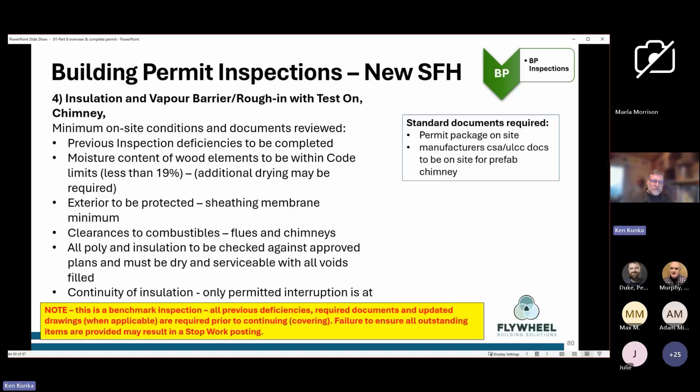This, as well as the mechanical inspection, is a benchmark inspection. All the items that may have been brought up as a deficiency during framing need to be completed before this inspection, because the next step is covering everything up. Also, in framing, you don't want the insulation in there already, especially spray foam, because the inspectors want to look at that as well. So there's some nuanced changes as you go along.

Insulation and vapor barrier, again, plumbing - this is a very critical stage for the plumbing, and there's a number of items they're going to be reviewing. It could be a combination, or it could be two separate inspections, but again, it's a benchmark inspection before you move ahead. With seasonal conditions of very cold winters, making sure your tests are being applied properly is really important as well.

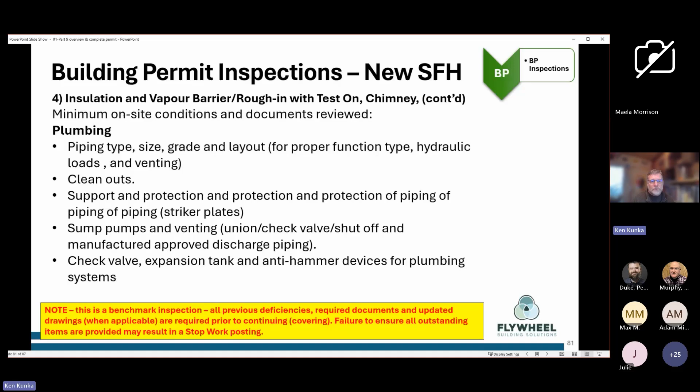Heating and mechanical systems are really critical to have set up. You're looking at layouts, any updates to layouts for mechanical ventilation checklists, and occupancy. So you're moving into the end - you've hopefully cleaned up all the loose ends, and now you're moving into occupancy.

Be prepared - there are some exceptions for having partial inspections, but really the building official wants to show up and deal with all the life safety standards as a final inspection, and make sure everything is there. It's really important to refer to your permit condition checklist to make sure you have all the documents you're required to have.

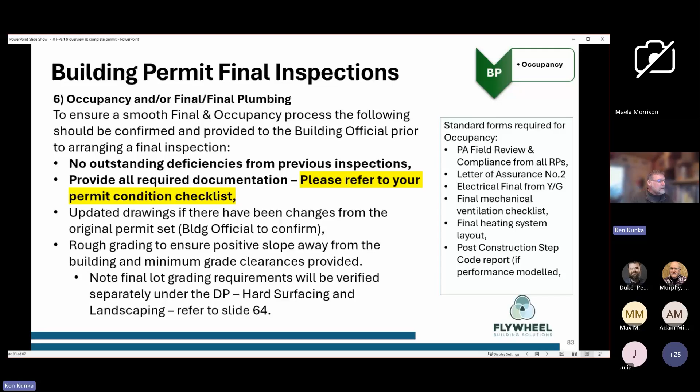You have your engineering sign off if you have the engineer. You should have your rough grading done, those type of items, as you move into finalization of this project, and then finally your DP for hard surfacing. Highlight the yellow section here.

An occupancy or approval certificate will be issued when there's a clean final inspection. So again, the building inspector will be looking at the site. There may be some loose deficiencies, probably not. Hopefully there's no significant layout changes, no changes, and nothing finished that shouldn't have been finished.

Your interconnected smokes and carbon monoxide, stair guards, handrails, attic accesses, general compliance, your building envelope, flashings - those type of things need to be done. Your decks and porches sloped away. There's been some real problems in newer subdivisions regarding frost protection and decks going up and down, and we'll talk about that. Your mechanical and plumbing systems all have to be commissioned and ready to go, and once your life safety is done, that completes your final inspection process.

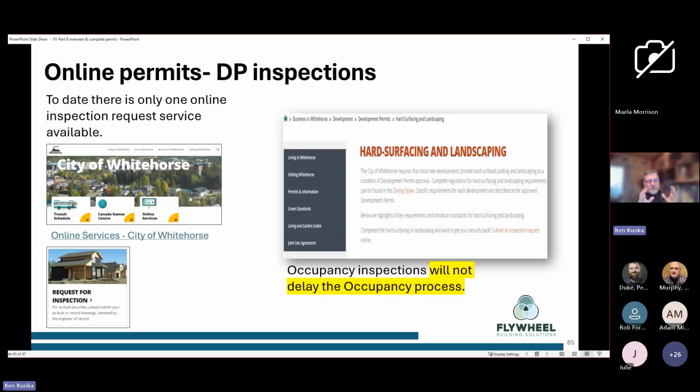And now you move into the DP sign off, and once that's done, you're done the project. You can request a development permit inspection online and go through that process, but really all the life safety, building component, building code, and bylaw stuff is all done. They don't want to hold up the occupancy part as much as possible, which ties into the development permit application, because we started parallel, broke off the building, and now we're finishing up with the DP process.

So that completes that overview.

I just want to highlight what we'll be talking about next week. Our next session is excavation, footing, foundations, radon, and drainage requirements. We're going to touch on a number of items, including perhaps something you haven't been familiar with, ICF, because Richard, I, and the building team see it as a way of moving forward and away from permanent wood foundations, which is being challenged in our new subdivisions with some of the soil conditions there.

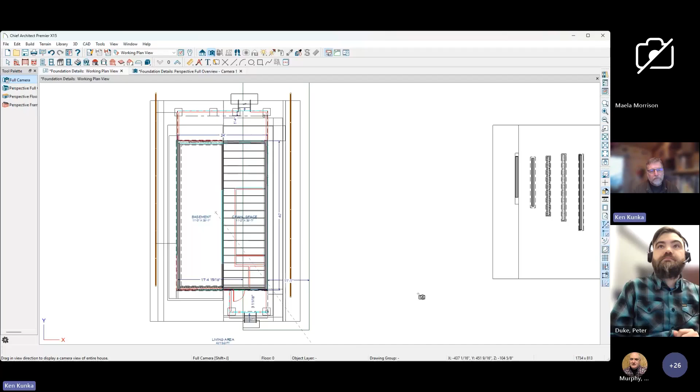Thanks, Peter. I did want to show the group where we may go with the drawings. There are some examples here, this is a rough floor plan, and as we go along over the next few months, I'm going to develop, and work with the building officials, work with some designers and builders in town to make sure we have a good set of example drawings. You can see here as a foundation, but in particular what I wanted to show was we can really look into different parts of the building. There'll be a slide deck, but I also want to jump into here.

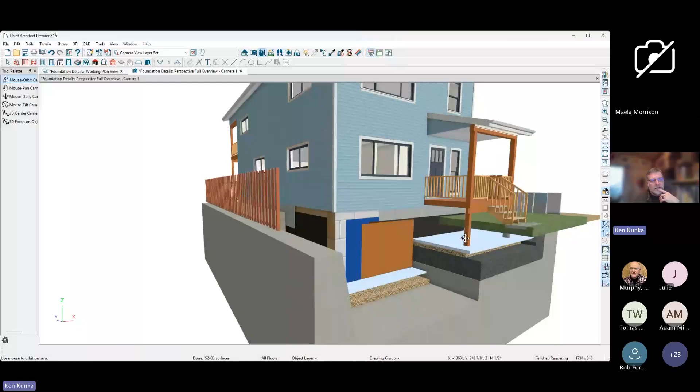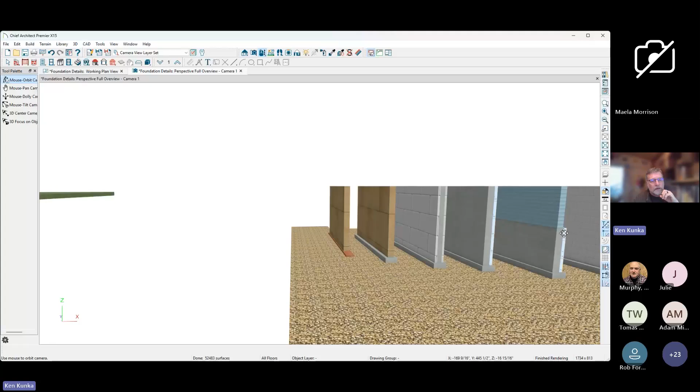There's been a lot of issues regarding decks and frost heaving and those types of things. We could be looking at wood foundations here and how those have to meet the new standards. And again, probably looking at engineering, but also ICF. You wouldn't mix the two like this, but I just wanted to show examples and items where we could be looking at different types of foundations and the pros and cons of those. We're probably only retaining a few of these because some of them just don't work, they're not feasible economically or don't make sense here.

So I just wanted to show the members some of the tools I'd like to use, and where we see a possibility to change our mindsets on both sides of the counter. These sessions will be an opportunity to do that and lead into better forums and guides that we'll be developing moving into March. So that's all I had.

Just be mindful, as Peter noted, of some of the changes that are happening and some changes that will be happening. It's really all part of the problems we've had over the last few years. I've worked in a number of different communities, and I really see Whitehorse taking this seriously and moving ahead. But one thing we've mentioned a few times now: don't wait till the last minute to make your building permit application. If you have questions about certain issues that could come up, reach out prior. If you're a builder, work with your designer in conjunction, and work with your trades as an integrated design plan, move into the development permit and building permit stage together, fully understanding what's required, make it a complete application, and don't wait till the last minute, because there are incentives not to, as Peter mentioned.